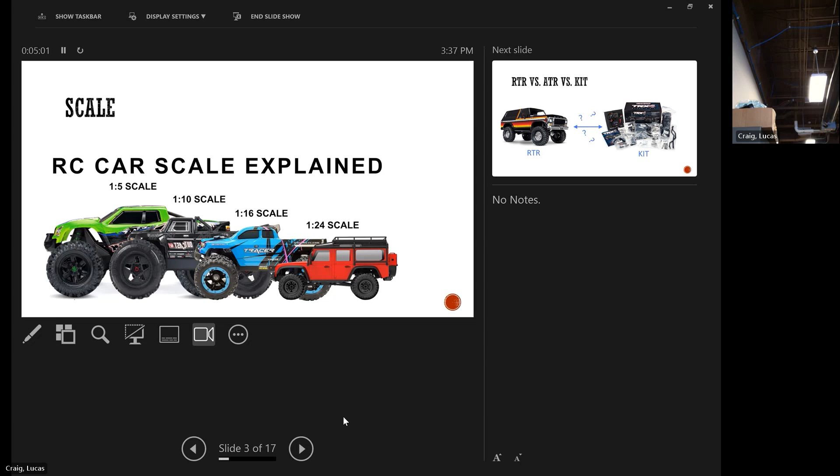Now, this kind of goes along with robotics too. Do you just buy a full ready to run, RTR, or an ATR, almost ready to run, or a kit, and you build it from that? Now, a lot of the times, the ATRs, almost ready to run, don't contain maybe a transmitter and a receiver, which I'll talk about later, like what those are. So you may have to buy those.

Kits, majority of the time, you have to put everything together from scratch. You have to paint, and there's actually a certain way you paint. You don't spray paint on top. It's a clear body, and so you actually spray paint underneath because you don't want it to scratch when it hits something. So when you paint something, you're thinking in reverse, right? Because if you paint it all black, then this is going to be all black. So you have to tape off, paint it, take the tape off, and then paint where you want. So it's in layers.

They typically do not have a battery or a charger. Sometimes the RTRs or ATRs will have a battery and a charger, but it all depends on the company. Now, ground vehicles, which again kind of goes with robotics, you can have a vehicle that is two-wheel drive. So this one right here is two-wheel drive. The back is where the motor is housed, and there's no shaft from the back to the front. So these wheels just spin freely. This is two-wheel drive.

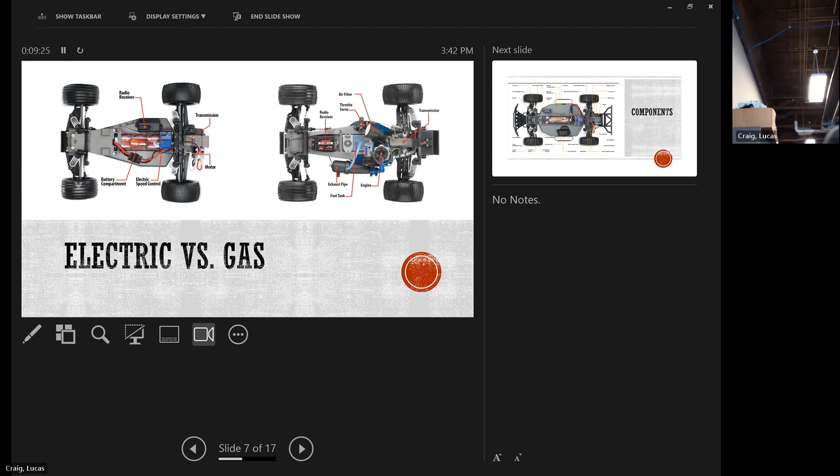Now, off to components. There's a lot of information in here, but pretty much the basics are as follows. Say you have a robotic kit here, or an RC car. You're going to have a chassis, which is like the outside casing that holds all of the components. You got the wheels, and the wheels could be different compounds like rubber, or they could have different treads on them so you can grip wherever. You will also possibly have a servo for steering. You will have a

receiver, which I don't know if I have right here. Let me show you this. There's one in there. Actually, let me pull it out. So this piece right here where you connect wires is a receiver. And then you could have a transmitter. A lot of the times this is called TX and that is called RX. And you could get

transmitters and receivers that have multiple channels. This one actually has 6 channels: up and down, left and right, up and down, left and right, and then you have these top buttons up here to make 6. And you just have to figure out which channels correspond to which buttons on here. Now this is more of an airplane style transmitter, where typically for ground vehicles, you can get something that looks like this, where you have the throttle and the steering mechanism right here.

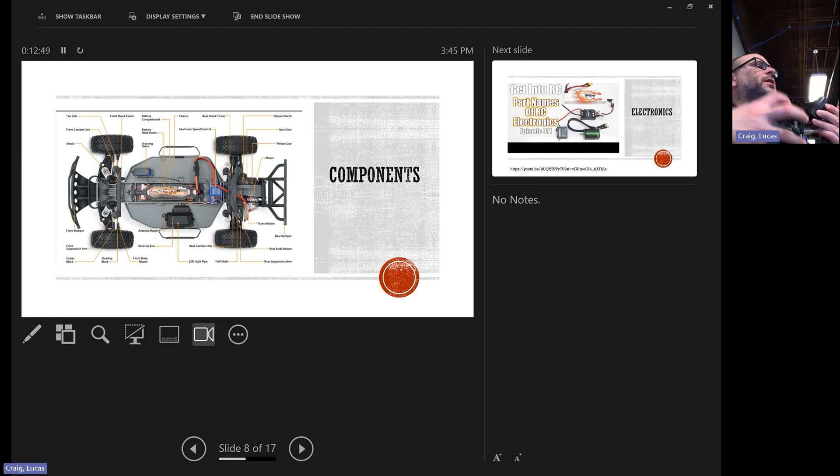However, we use brushed motors when you need instant movement or high torque, because sometimes these will take a second to recognize where the timing is for the sensors. So you have a transmitter, receiver, servos, electronic speed controller, motors, the chassis. You could also have shocks if you wanted to, or suspension systems. And then the last thing is batteries.

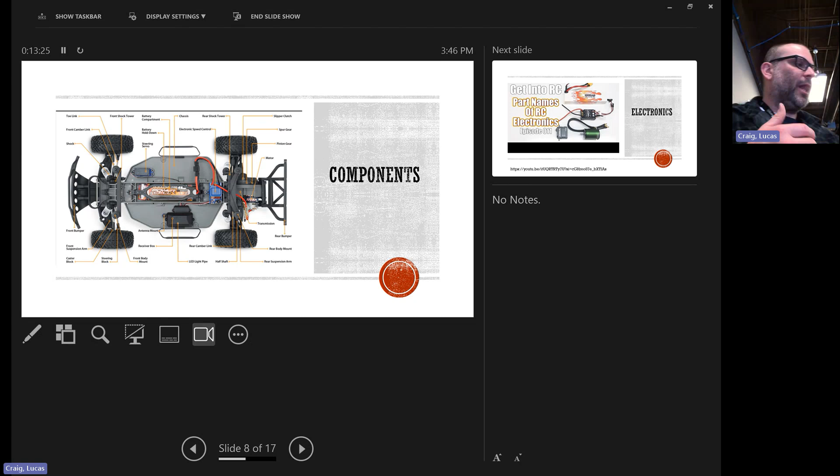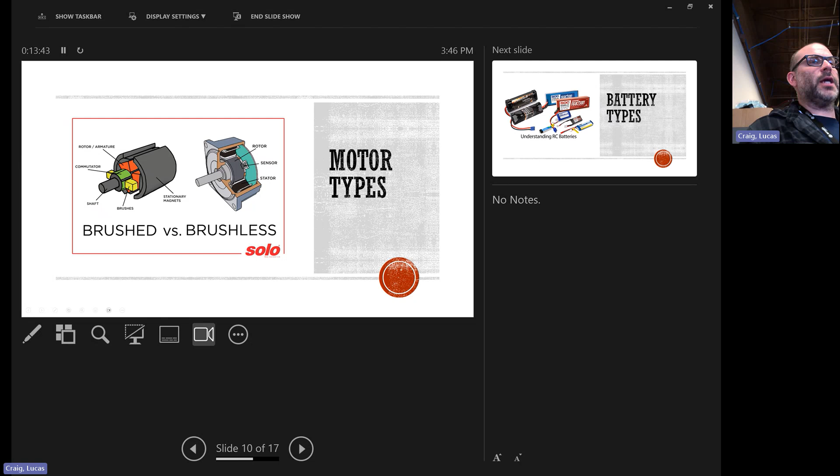And I think we went through the motor types. So again, these yellow things are brushes, and this is kind of how the contact works. Here is your brushless. It uses some sort of sensor timing mechanism. But let's get to batteries, because batteries are very important that you know everything about them. So there are 2 main types of batteries that we use.

These batteries right here are called nickel metal hydride batteries. And you can have 5-cell, 6-cell, 7-cell. This is actually a 7-cell. So there's actually 7 of these batteries that look like this. They're like a C battery. There's 7 of them in here. That's why it's a 7-cell. You could charge this up to 9.6 volts for this 7-cell. I believe it's like 1.5 or something for each cell roughly.

These are the safest batteries to charge and discharge and charge and discharge. As you drain them, they slow your robot down so you know that it's drained, and then you could charge this cell right back up. They're safe. The other batteries, these with 2 leads typically, although some newer ones only have 1, have sensors in here. These are called lithium polymer batteries, LiPo batteries.

And these are used in the robots because they produce constant power for the entire time. And they don't really decrease because you don't drop them below a certain value. So this right here has what they call a balance lead, and you need to charge each cell in these LiPos separately. Because you typically don't want to charge through the big plug, because you don't know if you're putting voltage to one cell or the other.

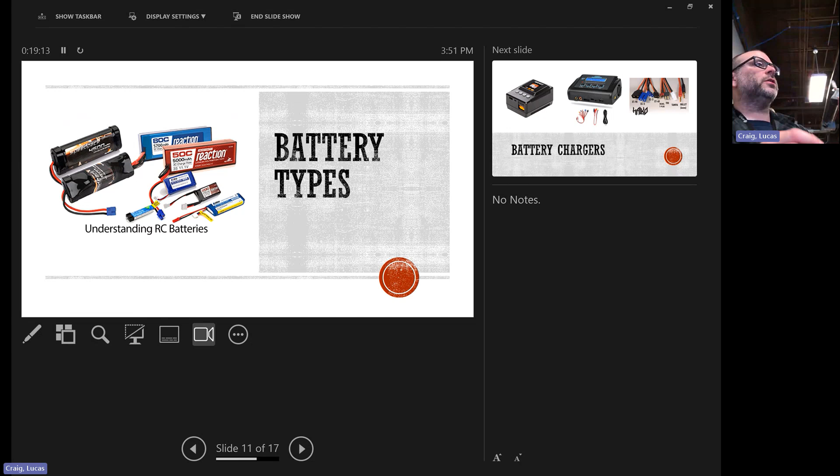Now, the reason why there's different sizes, do you see how it says EC5 and EC3? The bigger ones will allow more current to go through. So some of these wire, like this wire right here, I think is probably 16 gauge, I'm guessing. Where the battery like this is probably 12 or 14 gauge. Actually, this is 12 gauge and this is probably 16 gauge. That means that you're going to have more current going through these thicker ones. So you want to make sure that this connector will hold that current.

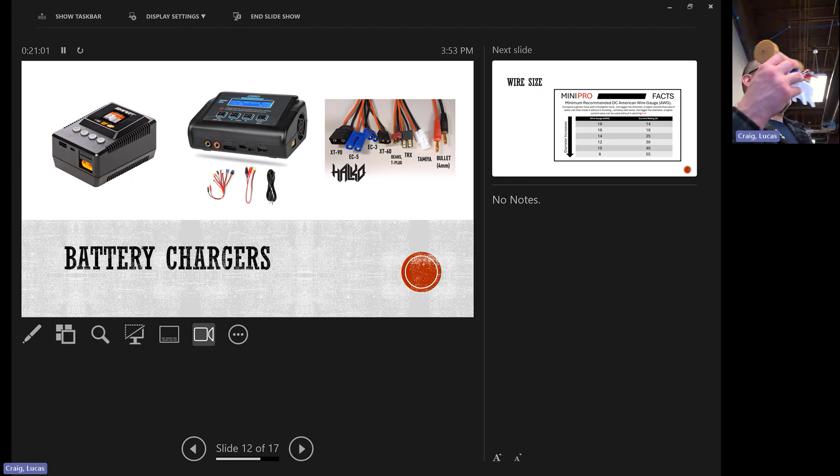Because on an RC car, you can get up to sometimes 30 to 50 amps coming out of a battery. So you want to make sure your wire size is big enough. On these robots, I don't think you'll ever reach probably 10 amps going through here. So you should be pretty safe with the size wires that are in these robots. That's where I talk about the wire gauge and rating. Typically 10 gauge will hold up to 40 amps. So you want to make sure you have the right gauge for that.

And then don't worry about that. Just kind of my thing. So that's a general idea of the fundamental basis for RC hobbyists. Questions before I move on? Okay.

All right. Let me go now to fundamental robot things, which are very similar, but a little different. So now we're dealing with robots. And again, you could buy a kit that has all the parts and then you assemble it. Or typically you can make your own by 3D printing. So basically, like this is the Viper, you could download the parts from a 3D printing website and then 3D print it and then buy the components. And that's what I did with this white one here, we 3D printed the chassis.

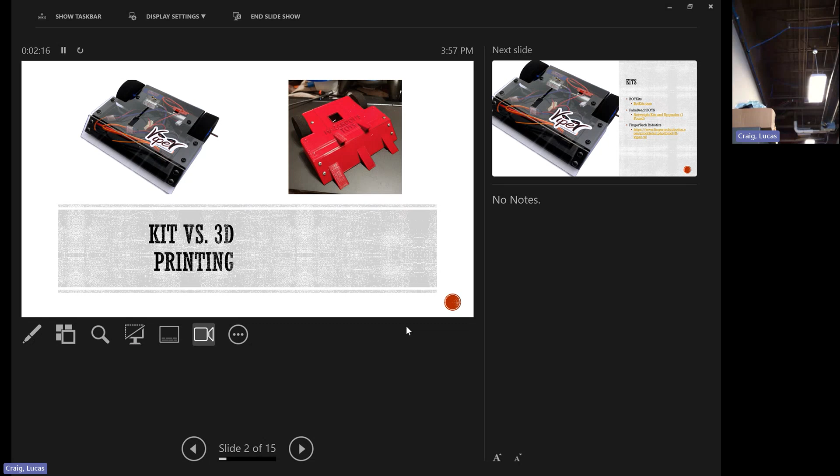So soldering is essential. I've saved my family tons of money by soldering. So, and you're gonna have to solder no matter what, even if it's a kit or not a kit. Eventually, some point you're gonna have to learn how to do that. So again, kits versus 3D printing.

And then I've also listed like fundamental ones that I got from most of the students in here, but you might be watching this like 5 years down the road. But these are kind of like the fundamental websites where you can buy the kits that are fully like parts, and then you can just assemble those.

Okay. Now, so let's go back and review the components just to make sure you understand what's inside these fundamental things. Okay. Now, so inside here, you have motors. In this one, you have two motors, and each motor controls one wheel. So that's how you steer. And that's why you're using one of these remotes, okay?

Because you can kind of control, there's two options. You can control each motor with one of these sides up and down, or you can program the transmitter with an online source where you can control it with up is straight, down is back, and then you could turn the wheels with this, okay?

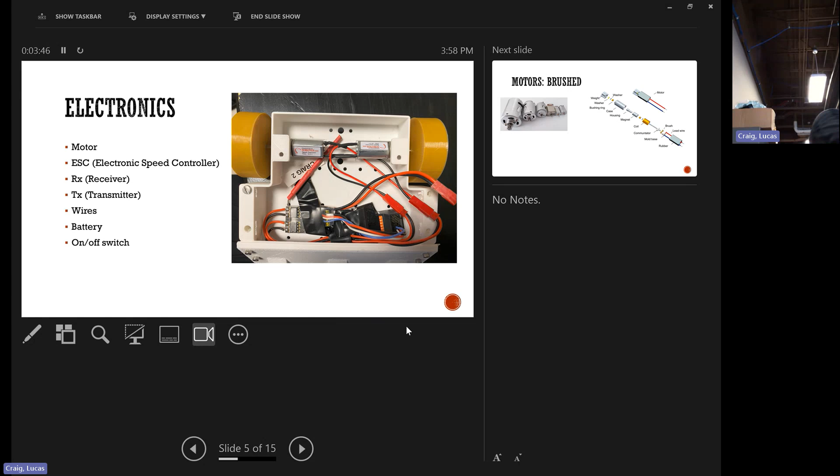You have the speed controller, ESC, which this one has a dual motor output. You have your transmitter, which I showed you, and your receiver. You got all the wires. You got the battery, which is right here with the right connector. This is actually a LiPo battery, okay, because it has a balance lead. You could have on and off switches if you want. These wheels right here are made out of TPU, so they're like rubber, okay?

So this one, again, I printed the chassis. I bought the screws, the motors. I had receivers, the ESCs I purchased. I 3D printed the tires, okay? We just actually quickly designed those in Inventor, and that's maybe what I'll show you how to do, a quick wheel, okay, for those that don't know Inventor.

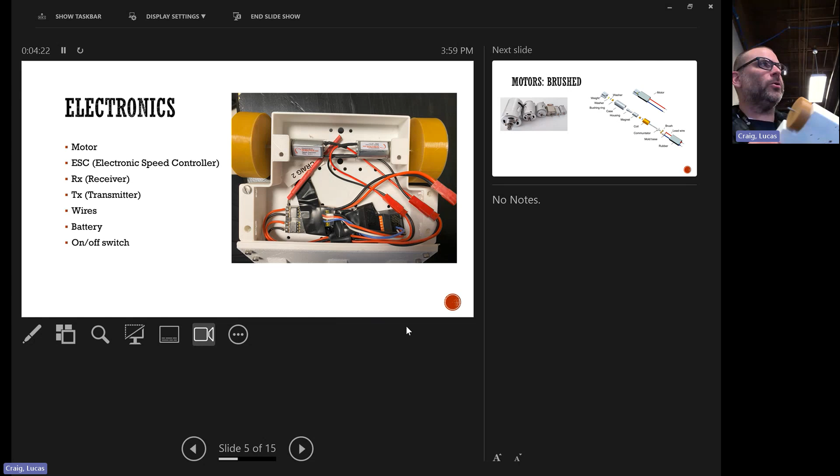And sometimes the motors have a, I don't know if those do, but they have like a torque rating. So like sometimes they'll say like 12T, or they'll be like 30T. So the higher number has more torque, okay? And the lower number, you can actually make your robot go faster typically, okay? So that's one thing to note.

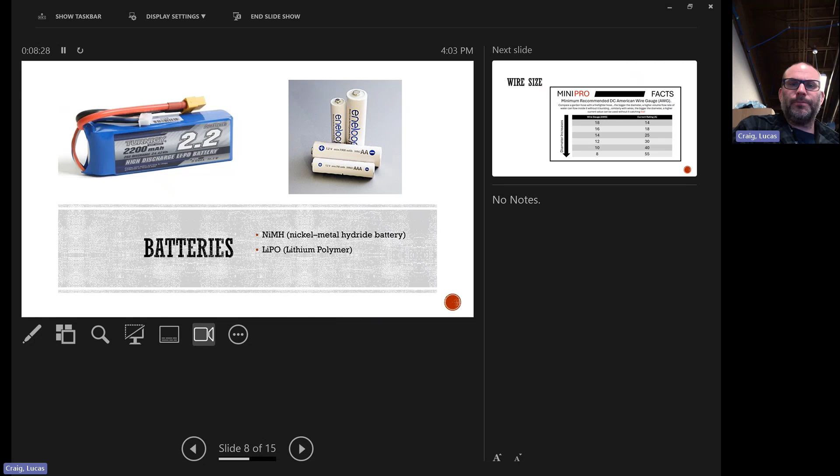So this, typically on an RC car, like a 1/10 scale, is probably 8 minutes, where that could be close to 20 minutes for 5,000. So depending on the battery and the milliamps, it could be bigger, heavier, and maybe that's what you need for the robots. It all depends. All right, again, I talked about batteries. I talked about wire size.

Say we go to Thingiverse, which is commonly where I go. And if I type in Viper Mini Robot, I don't remember the company's name. What's the company name for this? Oh, Fingertech. I don't know if it'll be on here. I know the file. Yeah, right here. That'll work.

What's this? Best Western? Get out of here.

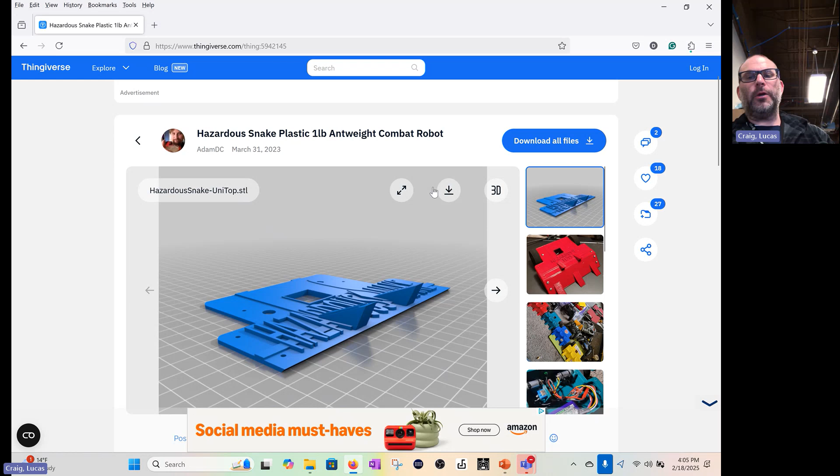So say you found something and you want to print it. You just click download all files, and then it should go to your downloads. Then you have to extract it. Click extract. And then there's a README, there's images, and then here are the files. So depending on what part of the robot you want to print, you can go ahead and grab that.

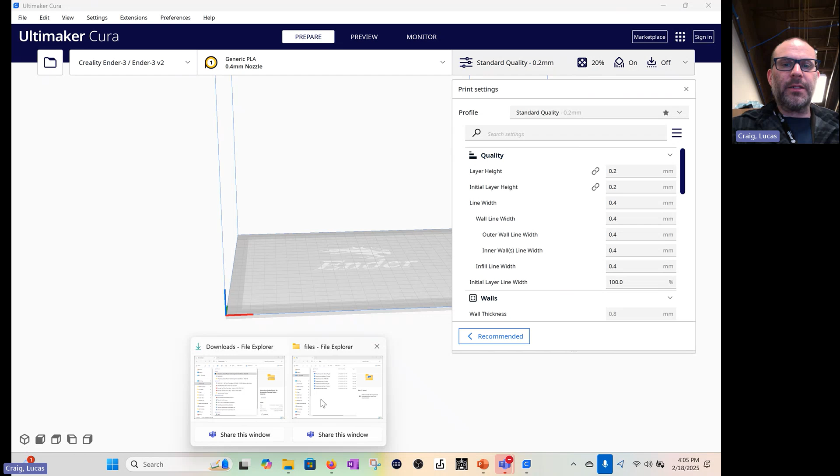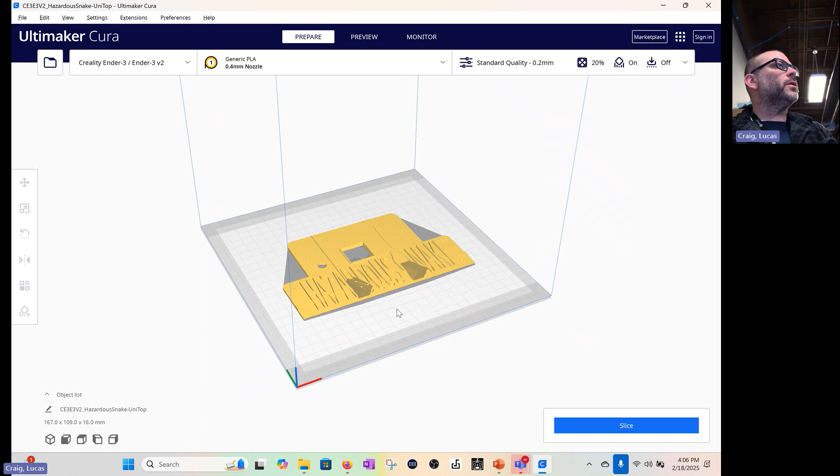Let's see. Let's do this. Let's see what this is. Yep, so this is just the top of the robot. And this is a program that you download. It's free. It's called Ultimaker Cura. This works, for the most part, with the majority of 3D printers. So you download this software and you bring this file in here. These are STL files that you would get.

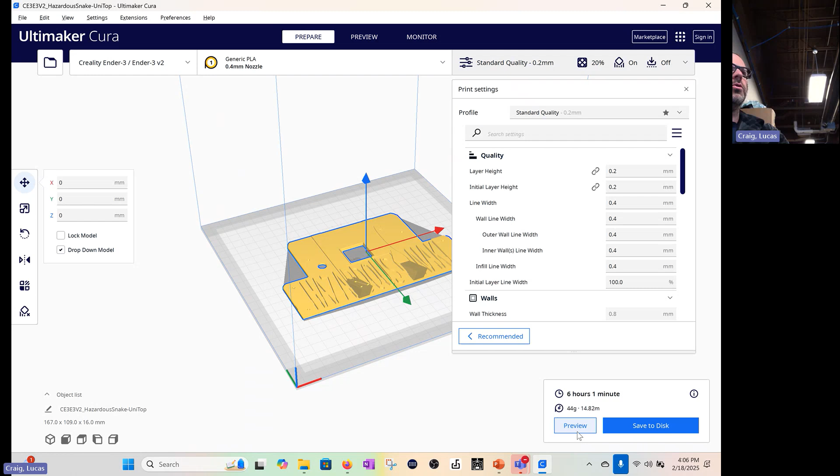And then you can change some printing settings. Maybe I could do another video just on very basic 3D printing. But you can change the percent infill from 10% to 100%, and then you can slice it. When you hit slice, it's going to make the code, and then you can save that code to a thumb drive, bring it to the printer, and print it. I can do a separate video. I might even have a video I can already share with everyone on how to 3D print. I'm pretty sure I have one somewhere. But you could print these parts and then start assembling what you need.

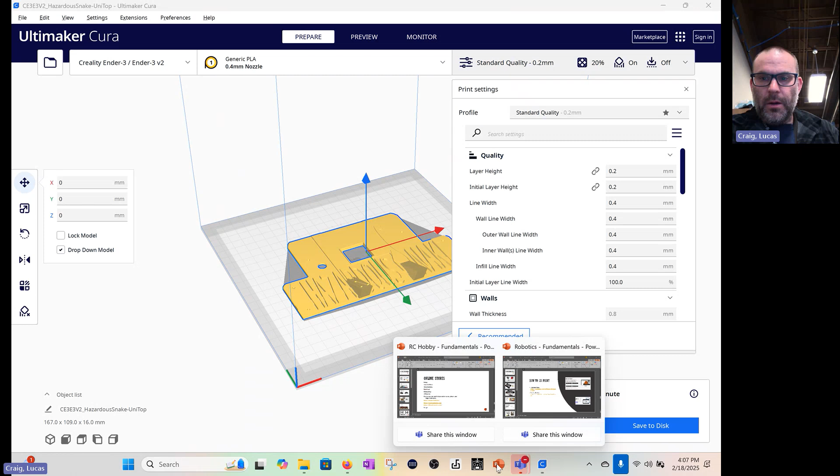All right, what else did I have on here that we haven't talked about? So with transmitters, I briefly talked about a way that you could program certain transmitters. You can program this one by using this cable right here. This is USB, that just plugs into your computer, and then this plug goes in the back of the transmitter. Just don't want to break it. You plug it in, and give me a second, I'll plug it in.

And I do have a video that kind of goes through this. So I can plug it into my computer, and you can download this, and I have a link right there, the TC config, and you can open it. Oops, I think I got to turn it on. So you download this program from that link, download it, you plug it in. Actually, let me unplug it and plug it back in. And it should. Let me try resetting. It's one thing I did.

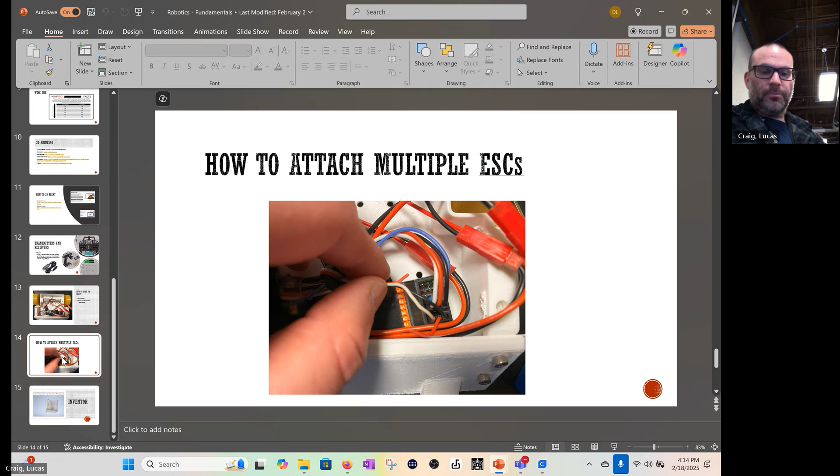What we could do, I would like to probably find a video on 3D printing, like a very basic one. What we can do now is, I won't do it here because I don't have Inventor. But those that don't know Inventor, do you two know Inventor at all? Okay, but those 4 are pretty good. I'll come over and just show you what you can do so you can design your own. Okay. Now, what's the next step or another workshop that you would want me to do? Okay. Sure.